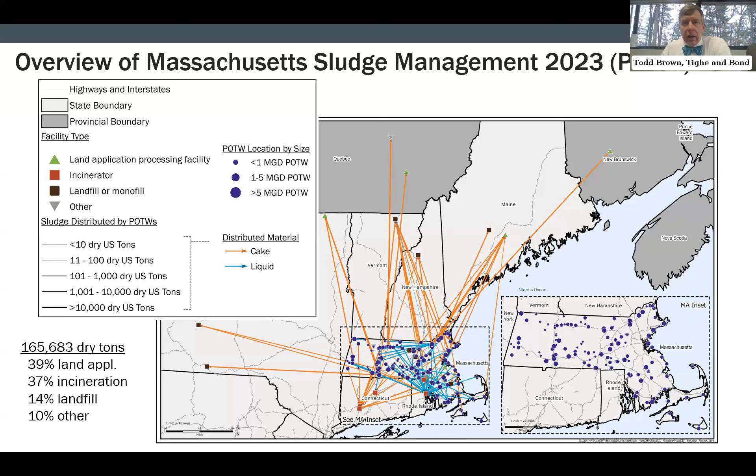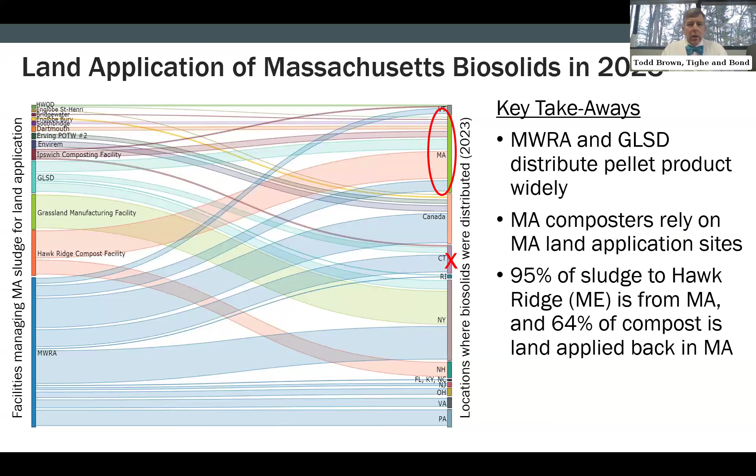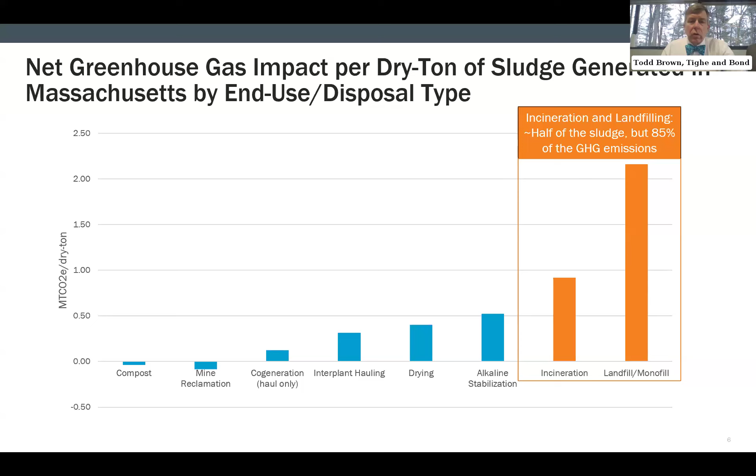And that just means that as the policymakers are contemplating the restrictions on land application to protect the public health from PFAS, they also need to recognize and consider the adverse environmental and public health impacts of shifting the sludge management options from the land application toward incineration and landfilling.

So in summary, the part one summary, I hope we covered a very large study very quickly, but the takeaways are that this is a very fragile network. There is essentially no spare capacity within this network to handle upsets in the system, nor to absorb additional sludge that is expected through population growth. In fact, in just a few years, we projected in part one that there will be an additional 12,000 dry tons produced that really we can't identify where it's going to go.

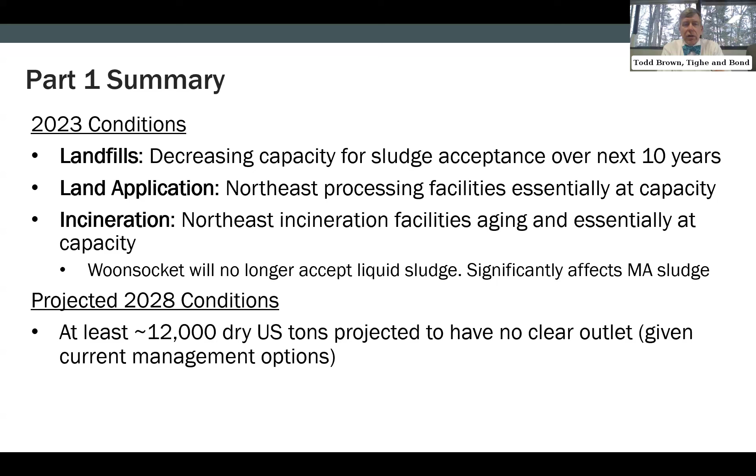And in fact, we saw with the elimination of land application in Connecticut, there are already shuffles within there. And when we look at the incineration capacity, these facilities are older. Their age is measured in decades, not just single years. And they're operating at capacity. And the land application is also at capacity, and landfills, we're not building many more in the region, and the capacity is getting used up. So it is fragile.

So moving on to part two, with this understanding of the existing situation, what we're trying to do in part two is look at what happens when we start thinking about PFAS, and what is PFAS going to do to impact this sludge management network, in the short term and longer term. And we do that by looking at the regulatory landscape in Massachusetts and beyond. We are looking at ways we can reduce PFAS levels, both upstream of the treatment plants and at the treatment plants, either in sludge or in the wastewater.

We look at sludge volume reduction technologies that are available to reduce the overall volume of sludge that needs to be managed. And then we provide some considerations for the treatment plants themselves and for the regulators and legislators that are working on this problem.

It's very important to recognize that this study does not address the public health impacts. It is not a quantitative health risk assessment. It's focused on the sludge management technologies, and it has the qualitative approach that if we can get PFAS concentration lower, that's better. Okay, that's going to be a lower risk, but it is not the scope of this study to try to quantify that.

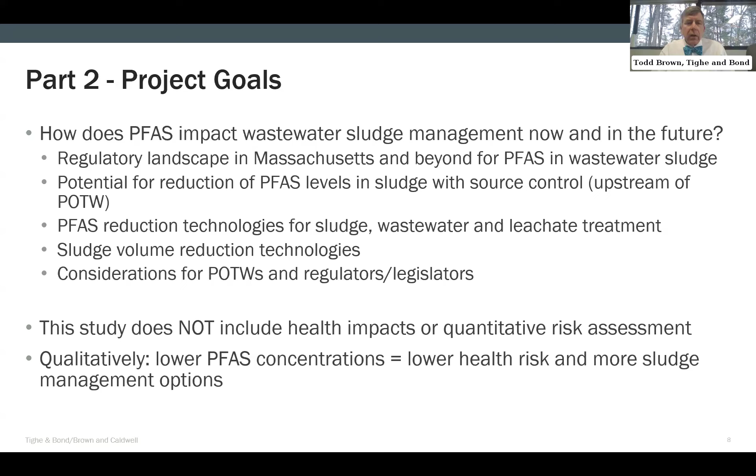So how can PFAS impact sludge and biosolids? Well, on the landfill side, we worry about leachate contamination, potential for soil and water contamination, even though they're generally in lined landfills, and the fact that PFAS is persistent and mobile. On the land application side, we worry about the soil and water contamination and uptake into plants through bioaccumulation. On the incineration, we worry about forming hazardous byproducts and the air emissions and ash residue.

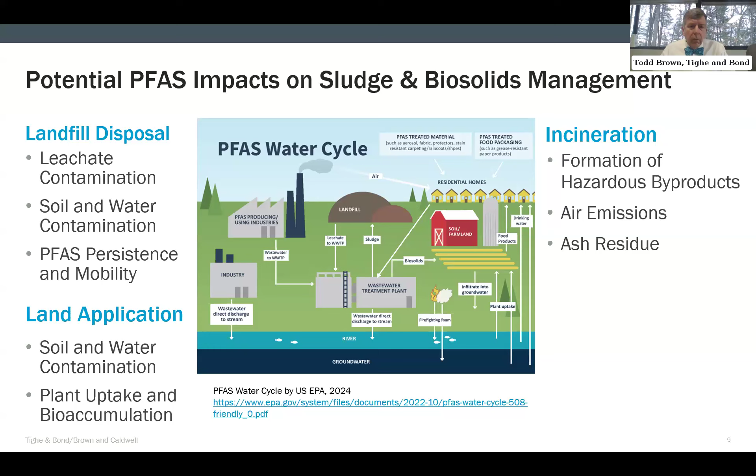Where can we take action? Well, this figure represents the treatment plant. I never defined POTW, and I apologize for that. POTW means publicly owned treatment works, and it's sort of what we refer to as the municipal wastewater treatment plant or municipal water resource recovery facility. We use those terms, or I use those terms synonymously.

But when we look at this, the plant is in the middle, and what is coming into the plant is shown on the left-hand side, and what leaves the plant is shown on the right-hand side. And we can intervene with PFAS in many points within this flow pattern. And the report, in fact, does that. And these numbers represent the section of the report that addresses it. But we'll talk about a few of these today. I'm going to focus sort of on the left side, and my colleague Bill is going to focus on the right side.

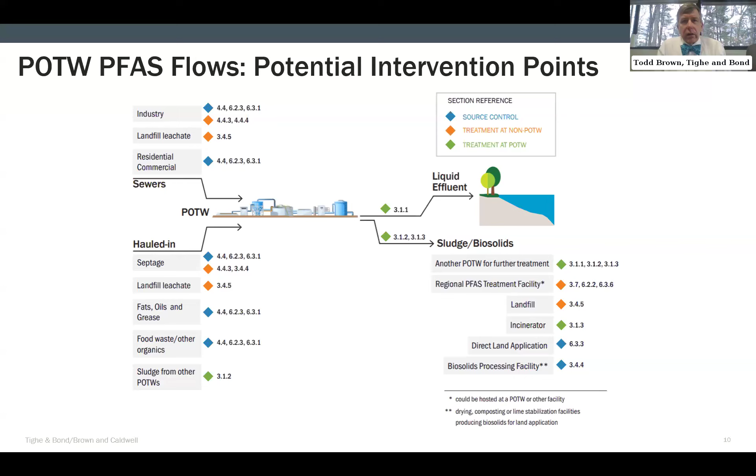So what can we do upstream of the treatment plant? Well, to assess this, we first needed to review PFAS data on the influent, effluent, and sludge that has been reported to the MassDEP PFAS data portal by treatment plants that have had this as part of their NPDES permit, that they are required to do this sampling. In addition, some other facilities who are not required have begun the process of quantifying these things, and they provided data to us as well. So we looked at a lot of data and

well, before I get into that, the reason we can do this is because there is existing regulatory authority for treatment plants to regulate what is coming into the plant from industrial sources, so that it does not adversely affect their operations, either in terms of the biology or their sludge management practices. So they can regulate it, but will that work in Massachusetts?

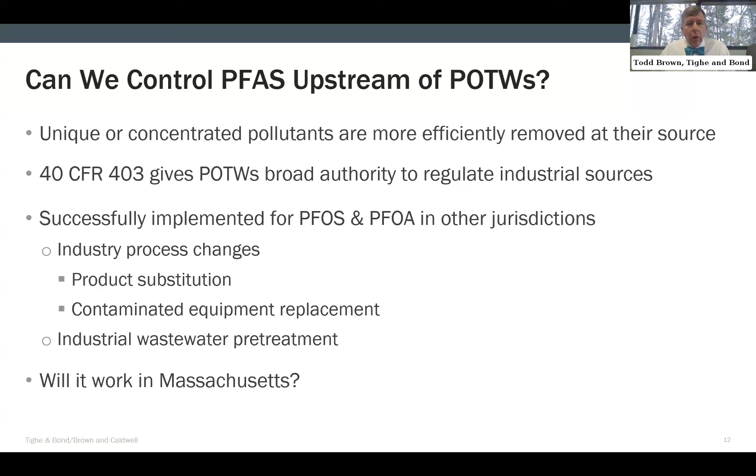So then in the data, the database is populated with the concentrations of 40 individual PFAS for each sample collected, for the majority of the data that has been input into that. The samples are grab samples that are collected at the treatment plant for influent, effluent, and sludge. And in some cases, individual plants have begun to characterize the discharges from industry into their facilities.

When we've evaluated all that data, we find some interesting trends, and that the top 8 species of PFAS that show up are the same in influent and effluent, and they show up frequently. More than 50%, the majority of the samples collected have these 8 compounds in them. When you look at the sludge, however, some are the same, but there are different PFAS species that show up at high frequency.

And then in the weeds of the samples, we also see individual spikes of an individual species at a particular plant. And if you're looking at those on an individual plant basis, they would raise questions about, is there a unique discharger within my service area that we should be looking at? Was there a slug discharge from something, or was it potentially a sampling or analysis error? But what we're finding is that these compounds are showing up regardless of whether industry is present, and that sort of implies the ubiquitous nature of PFAS.

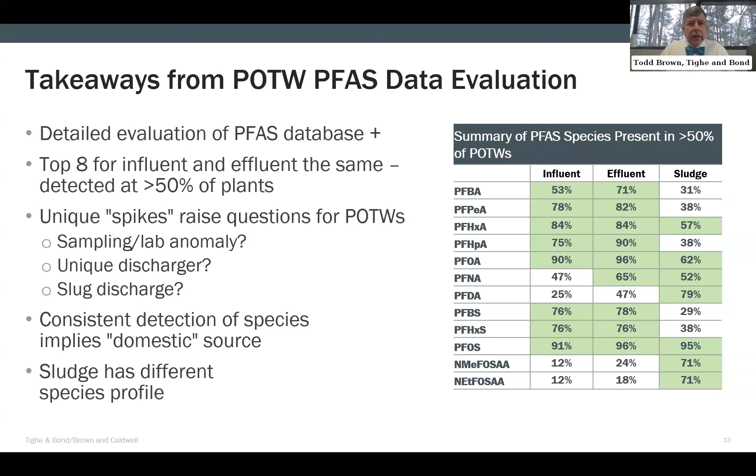To take a closer look at that, we were able to do sort of a mass balance at a few of the plants that have gathered enough data from all of the industries that discharge to the plants. And we have some flow information that we were able to calculate a mass loading from those industries, compare it to the mass loading in the plant influent.

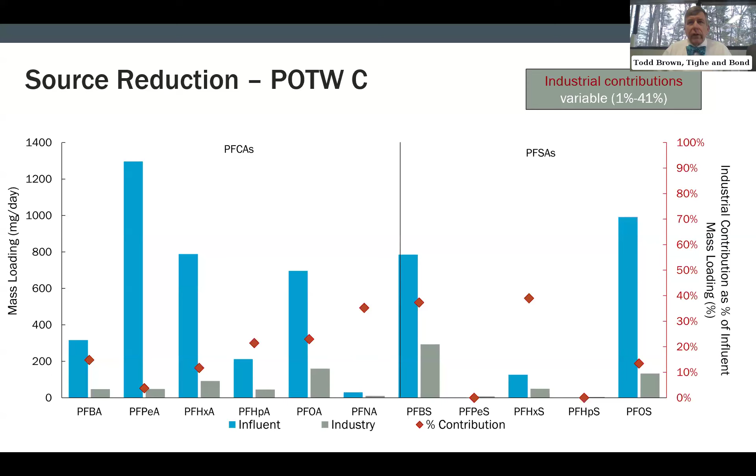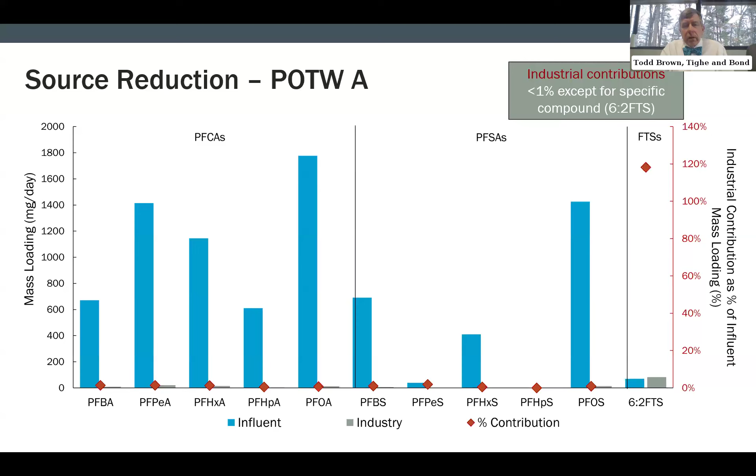So if it's not industry, then it is likely originating from homes and businesses, which lead to other means of source control or treatment. Now, my colleague Bill Brower from Brown and Caldwell will discuss addressing the PFAS at other intervention points within the plant.

Thank you, Todd. So as Todd said, he kind of focused on upstream, and what I'm going to talk about more is the treatment at the wastewater treatment plant or the POTW, either on the sludge side or wastewater. So we looked at a range of different technologies. We looked at PFAS treatment technologies for sludge, for biosolids, also for full plant flow in the liquid stream, and also for leachate. I'm not going to talk about leachate today, but it is in the report.

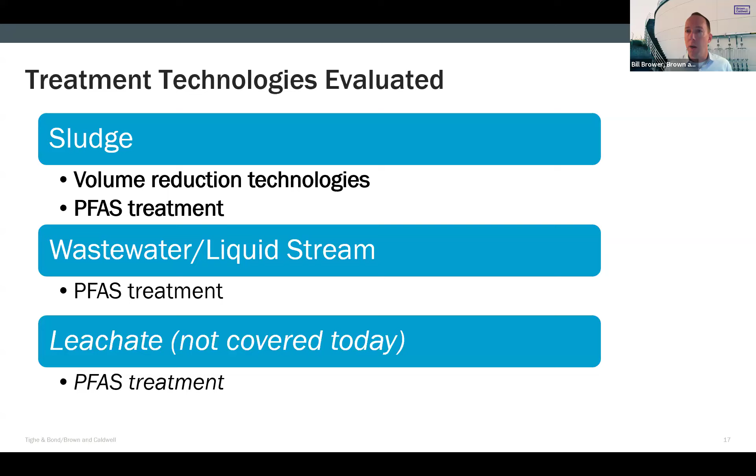I'm also going to talk about volume reduction technologies. Todd touched on this a little bit earlier, but for sludge, these are technologies like dewatering and drying and digestion that reduce the amount of material to be managed on the back end. So they don't directly impact PFAS, but they do reduce the overall amount of material produced. So starting first with those volume reduction technologies, we focused on mature technologies that have been used for many decades in the US and around the world.

So dewatering: it's taking thickened sludge, the solids that you're pulling out of the liquid stream at the wastewater treatment plant. That's what wastewater treatment plants do. They pull out solids so the liquid stream can be nice and clean when it goes out into the receiving body. So taking those solids and then dewatering them, getting out a fair amount of the water. We chose some representative technologies there that are widely used in this area. There are others, but these are representative.

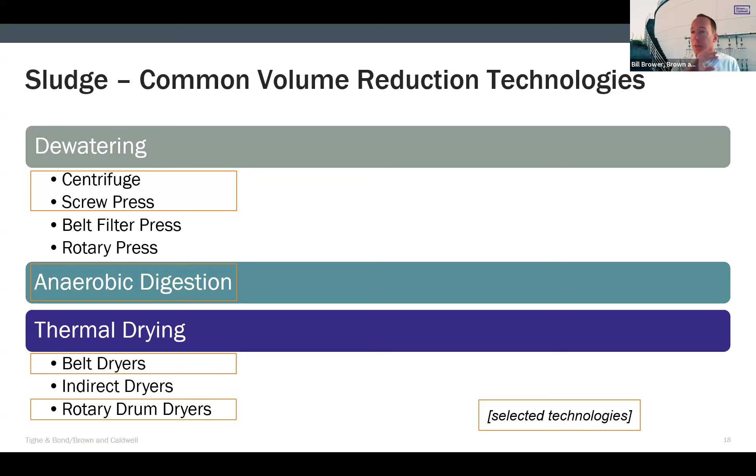We also looked at anaerobic digestion. This is putting those solids into a large tank without air for a long period of time, and you generate biogas, which could be beneficially used. And that biogas is solids that otherwise would have gone off as solids, but now they're converted to gas, so you have fewer solids on the back end. And then thermal drying can be on the back end of dewatering and/or digestion. That's putting it through various technologies that will heat it up and get off most all of the remaining water. So looking at these technologies, you'll see a few graphs that look like this.

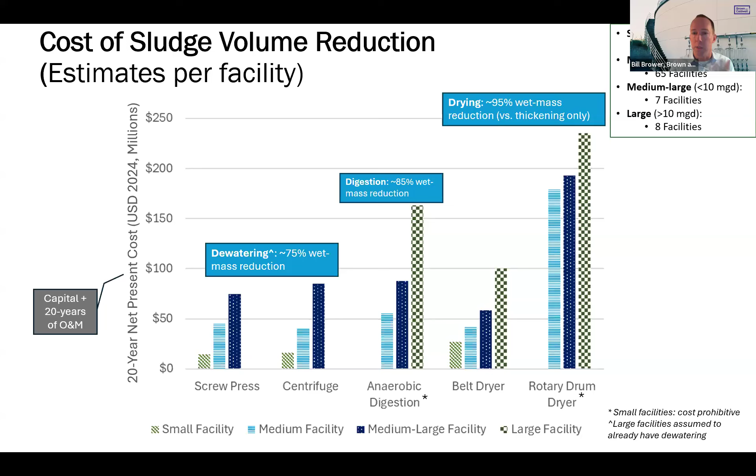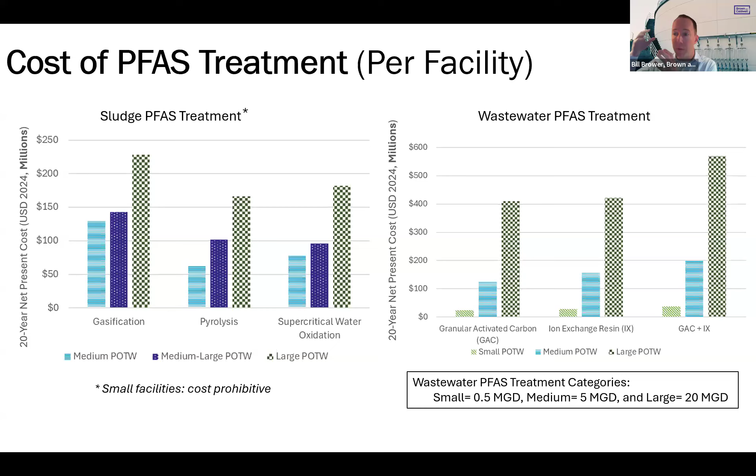On the wastewater side, so this is the liquid stream. So if you were to try and put on PFAS treatment at the end of the plant, on the effluent before it goes out into the receiving water body, so the full treatment flow. So if it's a 10 MGD facility, it'd be 10 million gallons per day going through these technologies. We looked at a couple of different technologies: granular activated carbon, ion exchange resin, and then the 2 in series. And again, net present costs for these different technologies. Lots more details on this in the report, but these are kind of the high level costs.

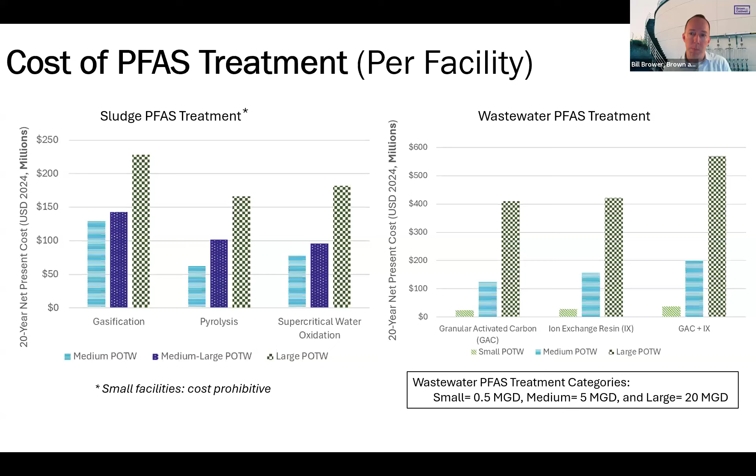So there was also in our scope taking a look at retrofitting existing sewage sludge incinerators for PFAS mitigation. The fate and transport of PFAS through these high temperature incinerators that are specifically for sewage sludge. There's some initial research that's been done by my colleague Lloyd Winchell and others that is showing that there's definite reductions through these technologies, but there's still a lot more work to be done.

So existing facilities, there are 2 sewage sludge incinerators in Massachusetts, Upper Blackstone Clearwater and Clean Water in Lynn. Both facilities have technologies on the back end of their emissions. Upper Blackstone has a thermal oxidizer. Lynn has an activated carbon system. Both of those systems are known to reduce PFAS, and they might reduce PFAS sufficiently just with their current equipment. Really can't know till the limits are set, and 2, we know kind of how efficiently their particular technologies are reducing PFAS.

But in our scope was looking at what if you did need to put in an emissions control on the back end of an incinerator on the airstream to specifically reduce PFAS. So the technology we looked at was regenerative thermal oxidizer, kind of the state of the industry best practice for reducing air emissions for PFAS.

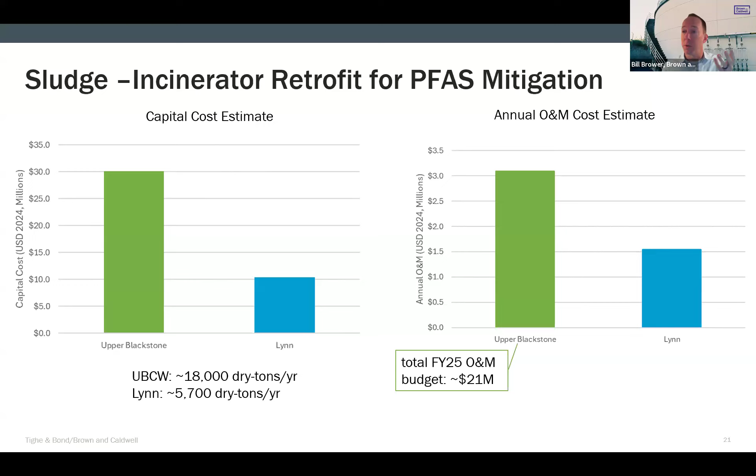Upper Blackstone is on the order of 3 times larger than Lynn, so the bars are higher, but it's a larger facility. So you're seeing here the capital cost, about 30 million for Upper Blackstone and 10 for Lynn, and then the annual O&M cost. And to put that in context, the $3 million for Upper Blackstone, that's the estimated additional annual operations and maintenance costs for putting in this regenerative thermal oxidizer on the back end. That compares to $21 million, which is their total 2025 operations and maintenance budget. So implementing these technologies would be a 15% or so increase to the overall budget of these facilities. And that doesn't take into account the capital costs, any bond payments that need to be made or whatever.

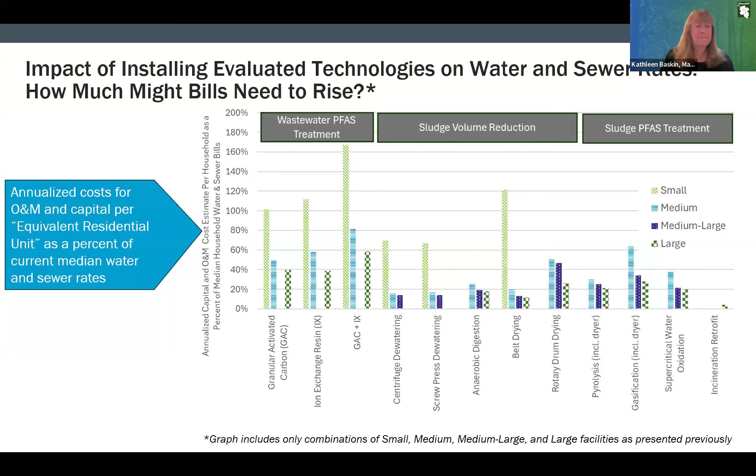Okay, so I wanted to also give some context: Massachusetts isn't in a bubble. So looking at things that have been going on at the federal level and also in surrounding states. In 2024, PFOA and PFOS, two of the most common PFAS compounds, were designated as hazardous substances under CERCLA. The impact of that is unclear for sludge management and wastewater treatment in general.

And just a couple of weeks ago, the EPA released their draft biosolids risk assessment. It's not a regulation, though typically a risk assessment would be the first step on the route towards regulation. Unclear what the change in administration is going to do to this process. But the results of this draft risk assessment showed potential human health impacts from all the typical biosolids management options we've been talking about today. So for incineration, landfilling, and land application, they were finding potential human health impacts based on their modeling.

And the land application analysis in particular focused not on the general population, but on those directly adjacent to or living at biosolids land application sites. So this wasn't for the general public. Happy to talk more about that, but that's the federal level overview.

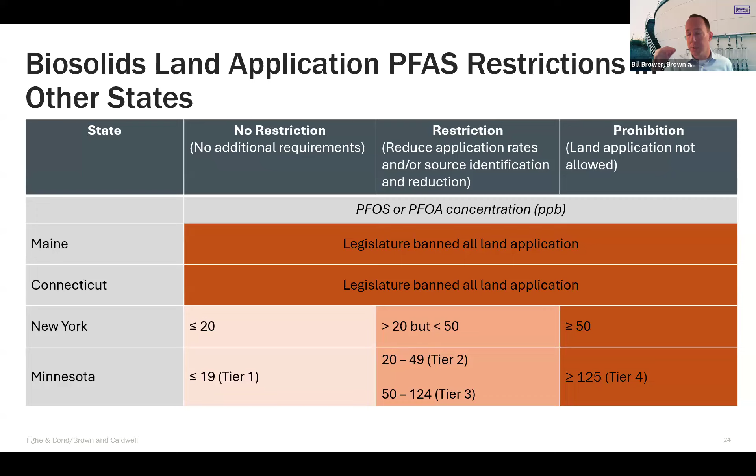And then there's a level, typically in the 50 to 100-ish range, where land application of biosolids is not allowed. That's the approach New York has taken, Minnesota, Michigan, Wisconsin, Maryland, and, though it's not on here, Colorado. And I'll point out Vermont as well. Vermont has lower levels and more compounds than just PFOA and PFOS. In Vermont, you can reduce your land application rate to get below these levels. You can also blend with other materials to get the resulting blend below these levels and then continue to apply.

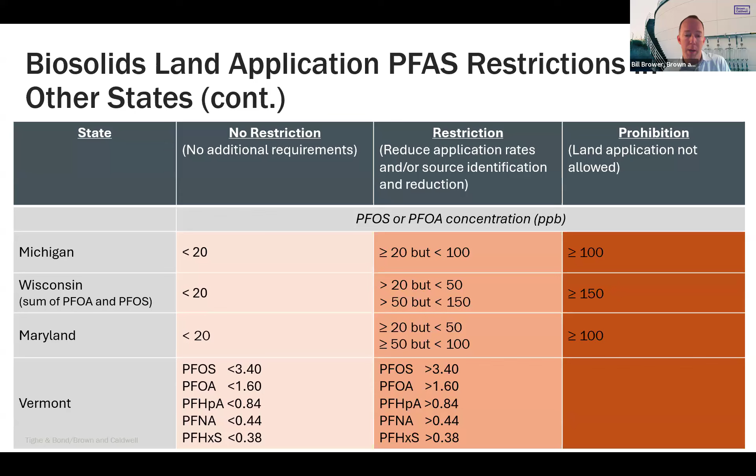So based on everything we were seeing and the analysis that we've talked about today, we came up with some options that POTWs in the Commonwealth can consider, and also for the state to consider. So first of all, looking at options that the POTWs consider to address this. We came up with a range of these options, and as a way to give an idea of prioritization or just different ways to characterize them.

So the kinds of things that we brought up that POTWs could consider, like Todd was talking about, undertaking local PFAS source reduction through the industrial pretreatment programs. But as he was showing, we'll get some facilities that can definitely have an impact, but what this work has shown is that for some facilities, there's enough of a load coming from households and commercial outlets that there's still going to be a significant PFAS load even after industrial users are reduced. Regular monitoring and reporting, just so people have an idea of what their PFAS levels are and how their different interventions upstream are impacting the plant.